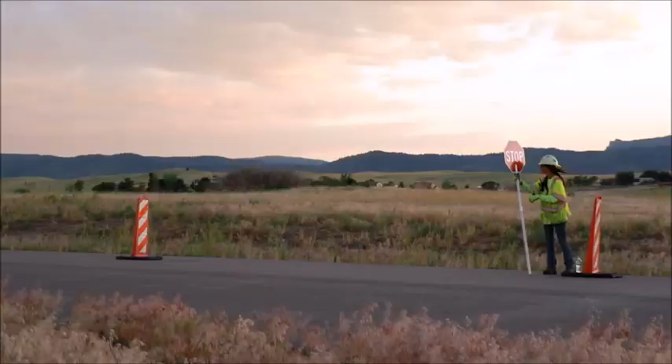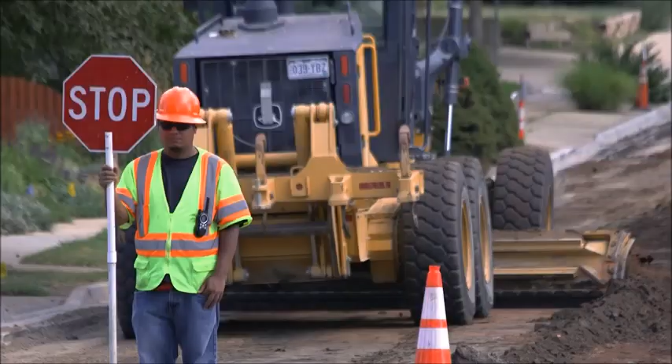It can be a fun and rewarding job, however serious. You must be equipped with common sense and drive for attention to detail, as it is dangerous and you are responsible for the lives of many, not just your own.

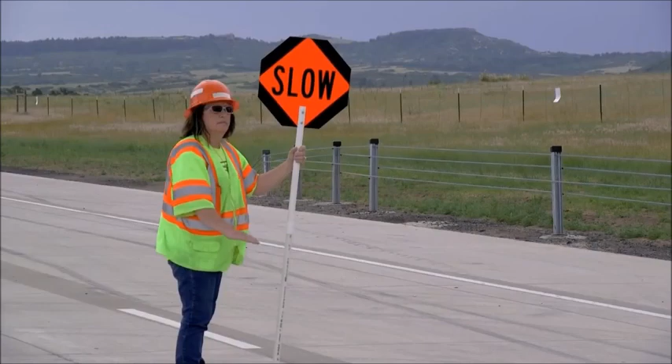As a certified flagger working in the state of Colorado, you will play a vital role in helping to protect the traveling public and your coworkers from the dangers that are presented on a construction or maintenance project.

All flaggers must be certified. The certification process involves study of the training manual, a written proficiency test, and a hands-on demonstration.

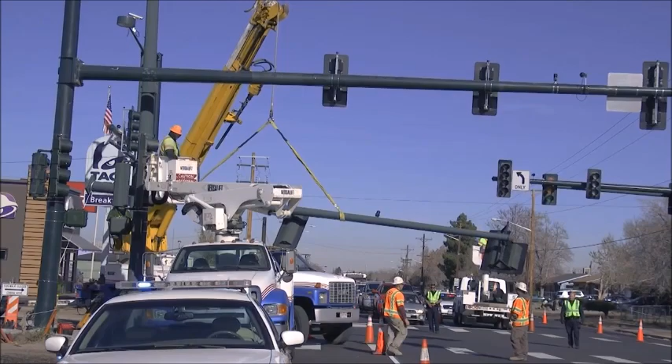In general, flaggers are needed whenever the safety of the working crew or the motoring public is a question. Safety questions arise whenever a traffic lane is going to be blocked, whenever an area is congested and equipment is going to be moved in or out of the project.

This being a general rule, keep in mind each job will have different demands and perhaps different duties.

Each project will have a superintendent who is an employee of the contractor. The superintendent is responsible for all work on the project. The traffic control supervisor reports to the super, and you, the flagger, will be a direct report to the TCS.

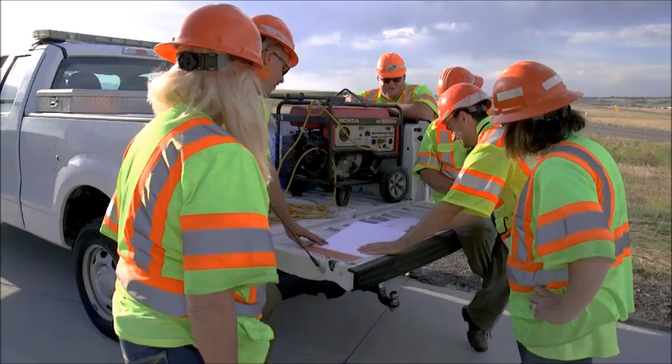A TCS will be able to help in any traffic or safety situation and be able to answer any question you may have. Remember, as a flagger, you should always ask questions when you are unsure.

In addition, CDOT staff may include the resident engineer, the project engineer, and the inspector, who will monitor the quality of the work being performed in all areas of the project.

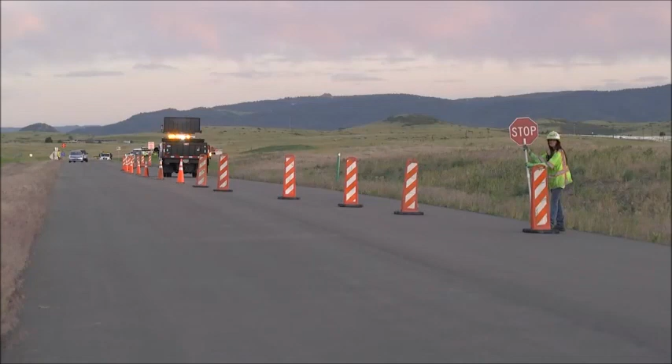It is the employer's responsibility to ensure that the flagger meets the minimum qualifications as outlined in the Manual on Uniform Traffic Control Devices. Because flaggers are responsible for public safety and make the greatest number of contacts with the public of all highway workers,

they should be trained in safe traffic control practices and public contact techniques.

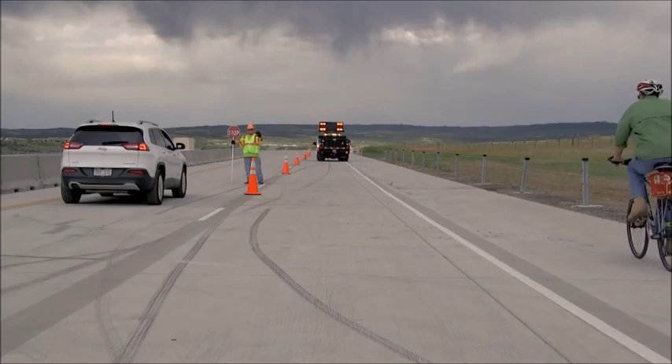Flaggers should be able to satisfactorily demonstrate the following abilities: Ability to receive and communicate specific instructions clearly, firmly, and courteously.

You will need to have a good working knowledge of normal traffic laws and regulations, as well as the more technical duties you must know as a flagger.

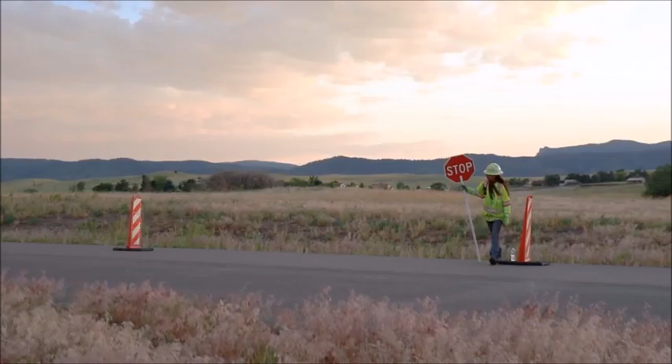You must know about the situation you are working in. You may be the only link the traveling public has with the work zone. You must be able to answer questions intelligently when asked, and you should know what kind of work is being done.

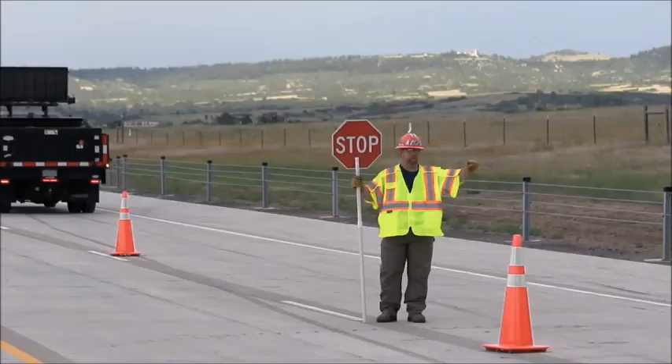You must always see yourself as a public relations person while at your station. Remember, a smile and a polite answer will go a long way in making the public more comfortable and less frustrated. Be polite, brief, and firm in your explanation.

You have the authority to control and regulate traffic around and through work zones.

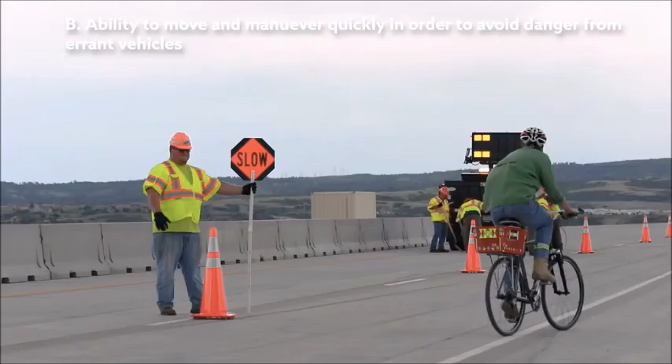Ability to move and maneuver quickly in order to avoid danger from errant vehicles. As a flagger, you are the first line of defense and are responsible for protecting yourself and your coworkers from traffic that is near the roadwork area.

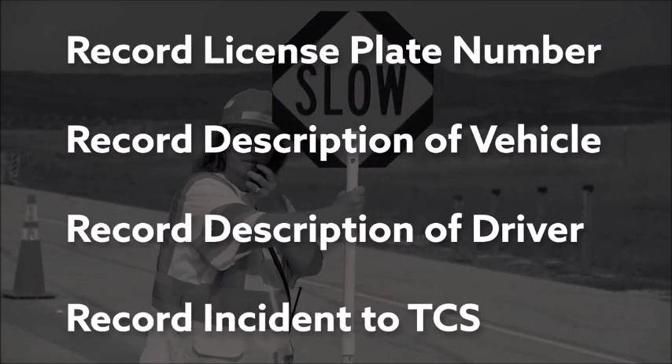If a careless or erratic driver does not obey your commands, such as refusal to slow or stop, try to get the license number of the vehicle or a description of the vehicle and/or driver. Report this to your supervisor.

Remember, you are not a police officer. It is important, and it is your responsibility, to remain at the flagging station at all times. Establish breaks with your TCS prior to your shift to ensure adequate coverage at all times.

Ability to control signaling devices in order to provide clear and positive guidance to drivers approaching a temporary traffic control zone in frequently changing situations.

You should be aware of all the flagging techniques and be able to use them on your job. This includes not only the actual flagging movements, but also equipment you will be using, such as different signs and traffic control devices.

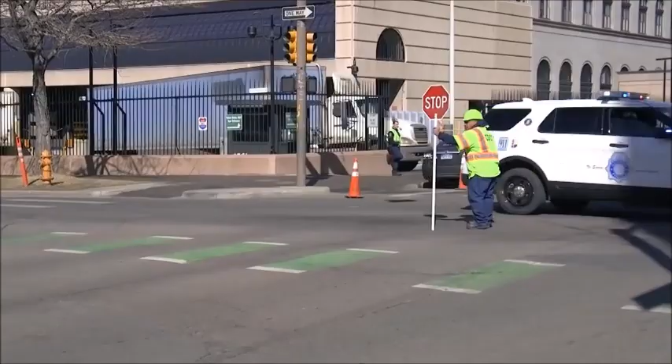This requires the ability to understand and apply safe traffic control practices, sometimes in stressful or emergency situations. Be aware that emergency vehicles may have to pass through the work zone. They do not have automatic passage through the work zone, however, provide access as soon as possible. Alert your coworkers to the passing of emergency vehicles.

The ability to recognize dangerous traffic situations and warn workers in sufficient time to avoid injury is essential. Be aware of weather conditions like heavy rain, snow, or fog. Bad weather may shut down the project, however, frequently traffic control must remain in place. You must know how to perform your job duties under any weather condition. You must also know the traffic conditions.

You may be on a high-speed, busy freeway, or on a moderate-speed byway or a city street. The speed and volume, as well as the type of roadway, may very well make a huge difference in your job. Your flagging station position is important for a number of reasons.

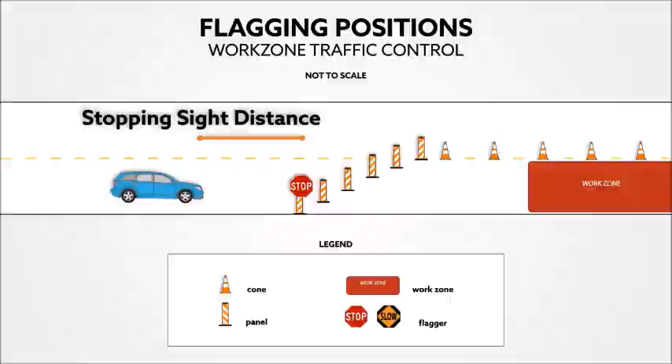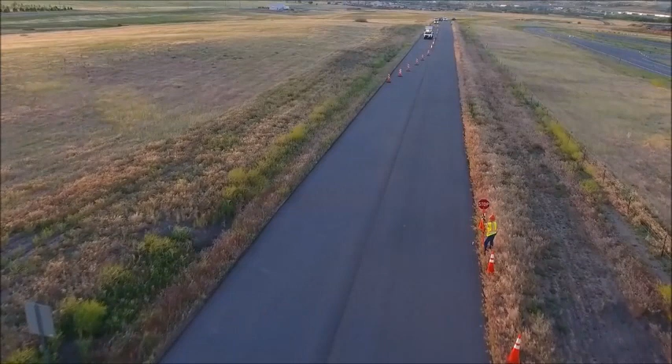You must be knowledgeable about the required stopping sight distances. You must be positioned so that you are clearly visible to oncoming traffic and have an escape route. You must be stationed far enough ahead of the worksite so that cars and even heavily loaded trucks can slow down enough to stop. You must be close enough to the work being done to protect your fellow workers.

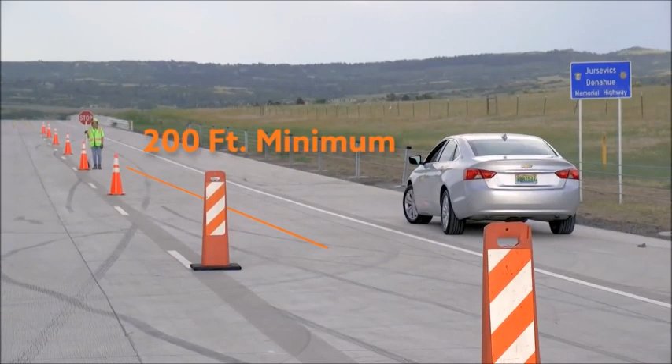Do not stand behind an object, just over the crest of a hill, just around the curve of a road, or next to a parked car. All personal vehicles should be parked 200 feet away and out of the right-of-way. Visibility is limited if you're next to anything that limits safety and mobility practice.

There are actions that prevent you from properly performing your responsibilities. Examples are mingling with the crew, relaxing, sitting down, listening to music, using a mobile device, or smoking while on duty. These actions make you less visible and less able to perform your role as a traffic and safety monitor.

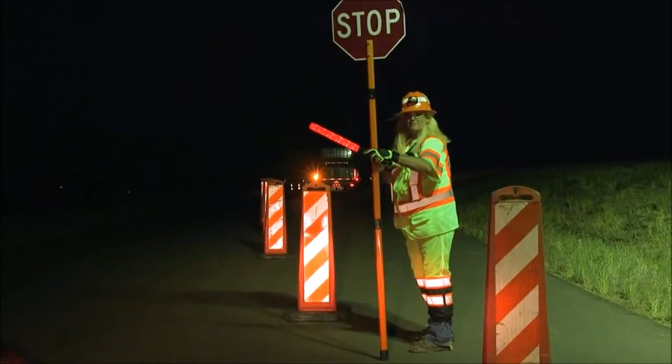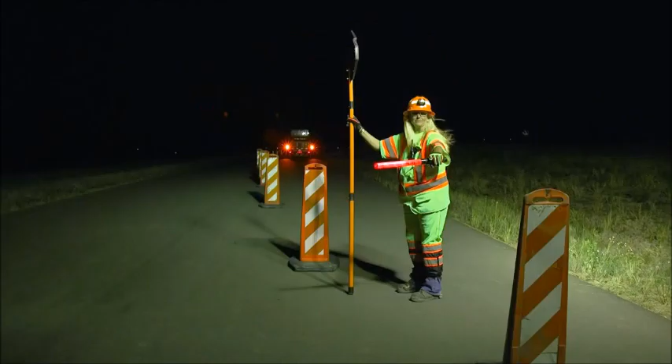Nighttime flagging can be very dangerous if not done properly. However, you can assure safe operations for you and your crew if you follow standards. Always wear a retro-reflectorized hard hat and apparel to help make you as visible as possible. Always use illuminated tools such as flashlights, lighted wands, and retro-reflectorized paddles and signs. Your flagging stations shall be lighted for night operations.

You are constantly exposed to dangers from the work activities, as well as from erratic or careless drivers. You may and will have to use your own judgment very quickly. Remember, always have an escape route. As a flagger, you will need to know where to stand to flag, the kinds of signs and devices to use, and information and instructions regarding the traffic situation. If you need help in a certain kind of situation, ask your TCS.

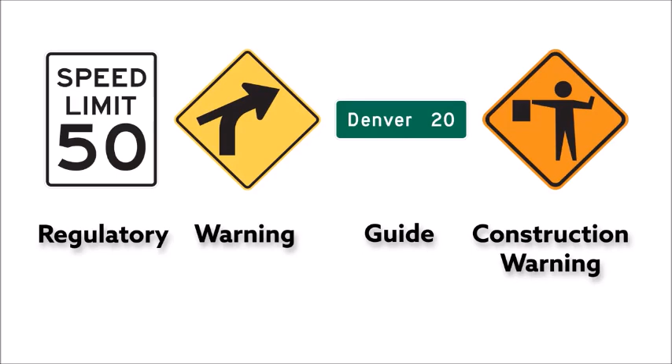There are 4 types of signs a flagger should know about. They are regulatory, warning, guide, and construction warning signs. Each type of sign has a different purpose and function. Each category of signs has a certain color and shape scheme so that they are easily recognized.

Regulatory signs impose legal obligations and restrictions on all traffic. Examples include speed limit signs, stop signs, and do not enter signs. Most regulatory signs carry a black legend and border on a white background. Stop and yield signs are octagonal or triangular in shape with white letters on a red background. You should be familiar with the regulatory signs as they do carry the full weight of the law. Please note, flaggers are not police officers. Only a police officer can override an existing regulatory device, such as a stop sign or a red light.

Warning signs notify the driver of traffic ahead. The motoring public should adhere to these signs. Warning signs are black letters on a yellow background with a black border.

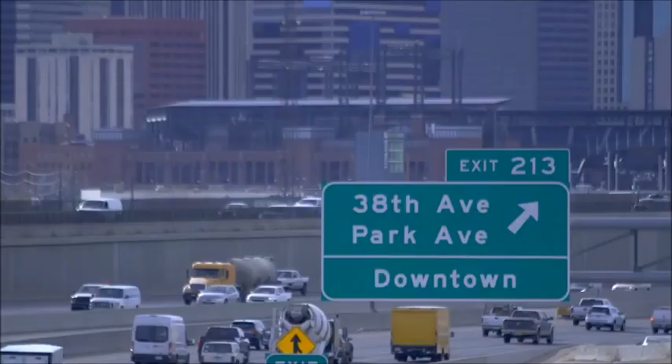Guide signs are information signs. They give the motorist destination information. Many guide signs are white letters and border on a green background. These signs also indicate directions and route markings.

Construction warning signs used for construction and maintenance projects notify drivers of construction dangers or hazards. Construction warning signs are generally, but not always, diamond-shaped and carry a black legend and border on an orange background. Some examples include roadwork ahead, flagger ahead, right lane closed, road closed ahead, and detour ahead. These signs may give special information relating to the work being performed, and may also indicate directions and route markings.

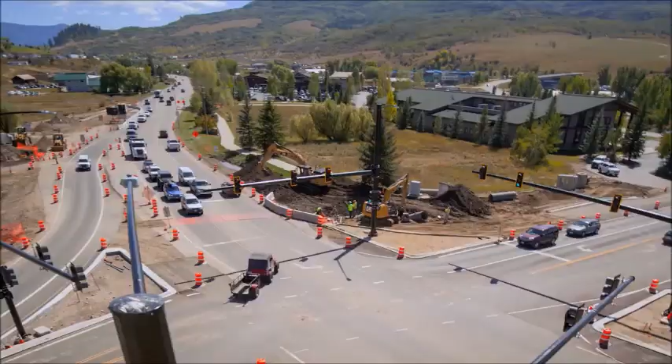There are many types of traffic control devices used in highway construction and maintenance work zone operations.

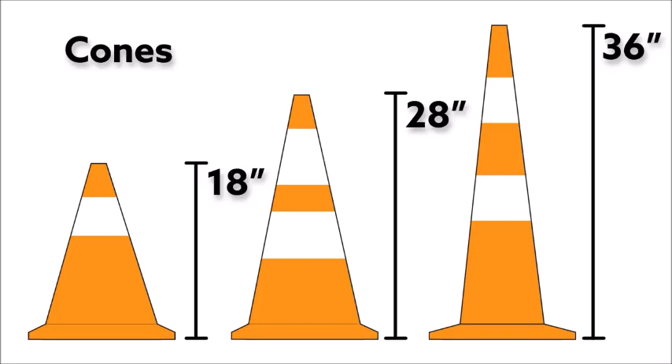Cones are the most frequently used traffic control device. They are lightweight, easy to move, and very visible to the traveling public. Cones are bright orange and are 18, 28, or 36 inches tall. They are typically 36 inches on high-speed roadways, which is a requirement for CDOT projects. Cones can be blown down or knocked over due to natural wind or wind generated from passing traffic. Never leave your flagging station to reset devices; inform the TCS of the situation.

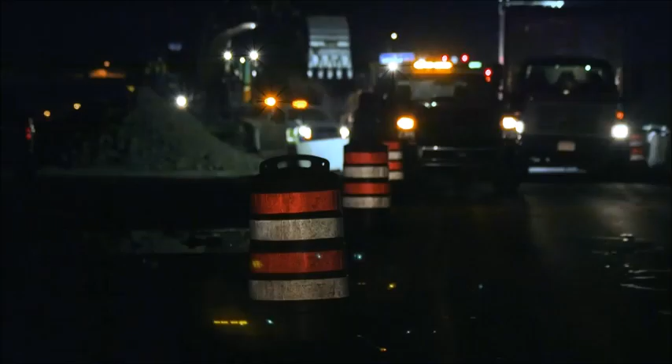Drums are very effective devices for controlling traffic. They are much larger and much more visible to the traveling public, and very effective in blocking areas where the crew is working. Drums are used in lane closures for long-term projects.

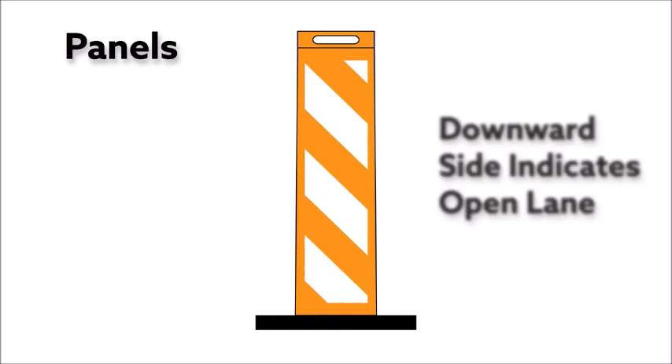Vertical panels are also an effective traffic control device. They are vertical, rectangular panels with downward diagonal stripes indicating the open lane. Vertical panels or drums must be used in the taper on state highways.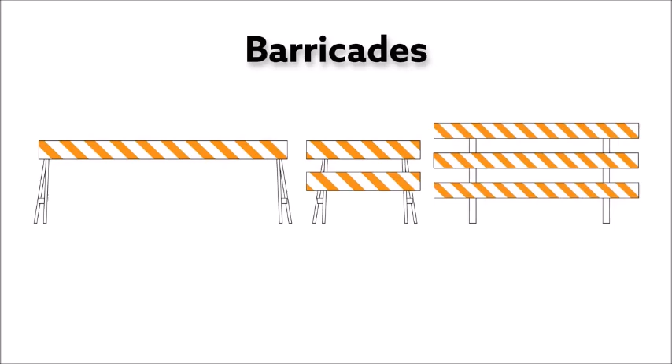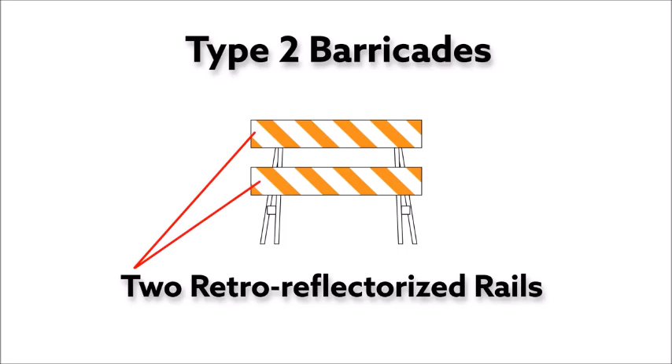There are 3 types of barricades used on construction projects. Type 1 barricades are portable and have a single horizontal retro-reflectorized rail, used on low-speed, conventional roads and urban streets. Type 2 are less portable than Type 1 and have 2 horizontal retro-reflectorized rails, used on higher speed roads. Type 3 are for extended road closures and have 3 horizontal retro-reflectorized rails.

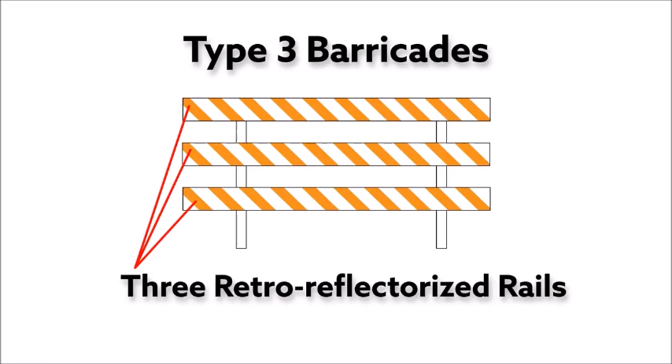Direction indicator barricades include an arrow and are used in tapers, transitions, and other areas where specific direction guidance to drivers is necessary. Again, the slanted stripes and arrow indicate the open lane.

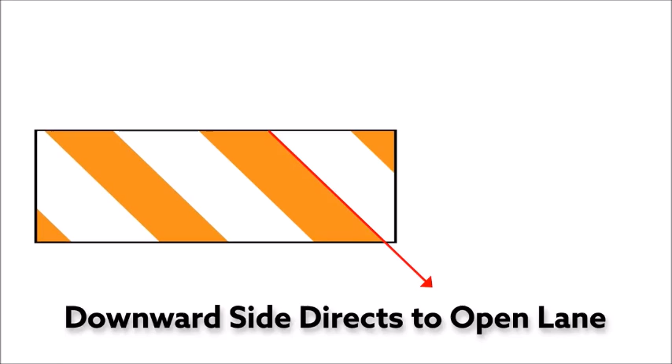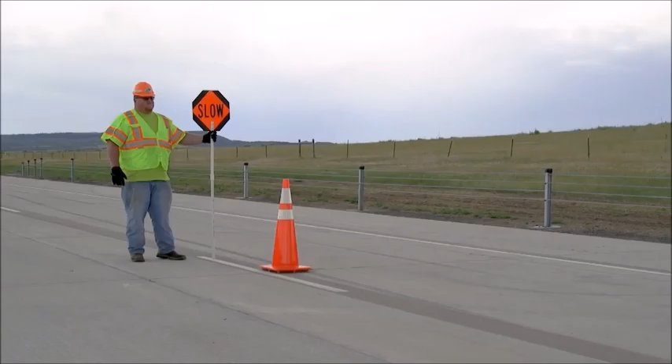The piece of equipment that you will use to control traffic is the stop-slow paddle. The paddle is mounted on a 5-foot staff for convenience and shall be maintained at a height to be visible to oncoming traffic. One side of the paddle is the stop sign, which is octagon-shaped with white letters on a red background. The other side is the slow sign, with black letters on an orange background in a simulated diamond. Both sides shall be retroreflective.

When flagging at night, you may use a flashlight with a red lighted cone on the end. The lighted part of the flashlight should be red and at least 6 inches in length. You may also use a lighted wand for nighttime operations; lighted wands are generally 30 inches in length.

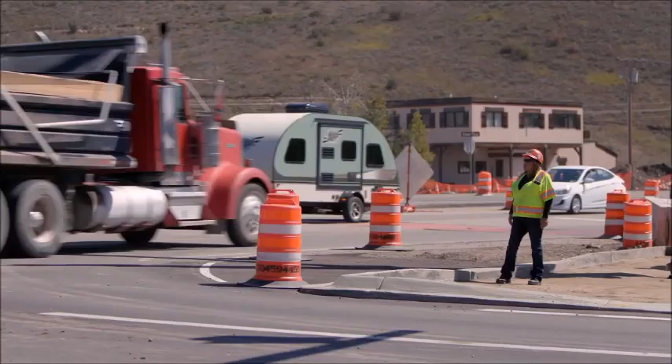There are several tools used to improve safety, including radios, air horns, or whistles. These may be issued to you to alert the work crew of danger. Radios aid in flagging situations where one part or end of the roadwork cannot be seen by the flagger or flaggers.

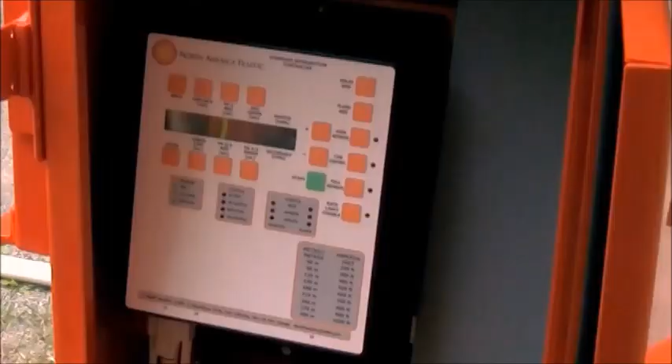As worker safety is a priority, AFADs were created to allow a flagger to remotely control traffic while remaining safely outside the travel path. These devices are not autonomous and require a certified flagger to operate. You must be properly trained before operating an AFAD in the field.

You must dress appropriately for the job. This is for safety and visibility reasons, and for overall consistency so that your authority is not questioned. Visibility is of very high importance, both day and night. If traffic cannot see you, they will pose a hazard to you and the work crew. Wearing the proper high visibility apparel helps with standardization and will help identify you as a flagger and your responsibility to safety.

All flaggers shall wear safety apparel meeting the requirements of the ISEA American National Standard for high visibility apparel, labeled as meeting the current ANSI 107 standard performance for Class 3 apparel risk exposure. Background materials shall be fluorescent orange-red, fluorescent red, or fluorescent yellow-green, and have retro-reflective material to provide the wearer greater visibility to the traveling public. This clothing is required by law. Anytime you are acting as a flagger, you must wear safety apparel that meets ISEA and ANSI standards. The apparel increases your visibility.

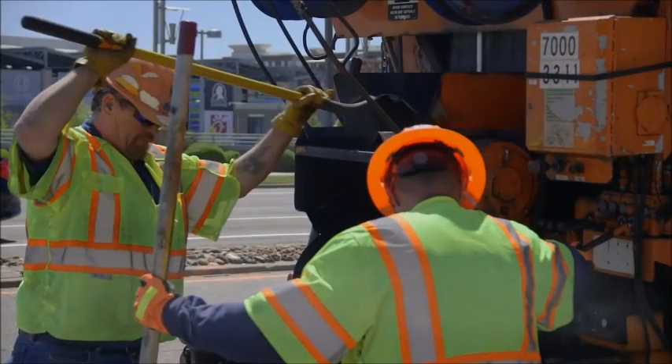The hard hat is part of the recognized standard uniform for flaggers and is required by CDOT. Hard hats shall be fluorescent orange-red or fluorescent yellow-green and include retro-reflectorized material. The hard hat also protects your head from flying debris and other dangers.

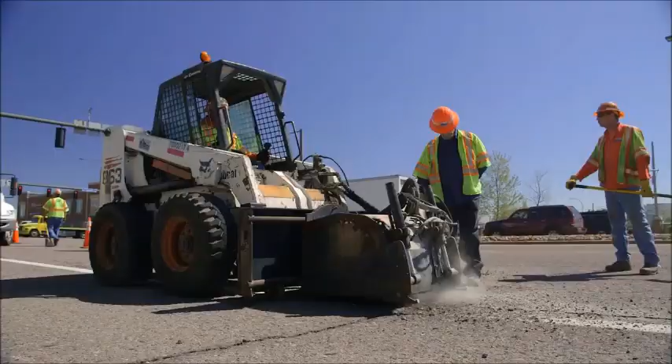You should always wear work boots that cover your ankle. They will help protect your feet from hot surfaces, uneven surfaces, and will help keep your footing around construction equipment.

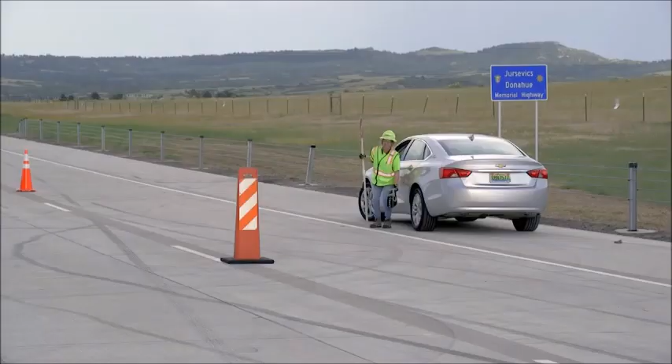There are other items you may want to have with you: a dust mask, hearing protection, gloves, a windbreaker, sunscreen, retro-reflectorized rain gear, and any other items that help combat the elements. Pack a bag with these items to keep at your station. Remember, always dress so that you are visible, safe, and comfortable, and always wear the mandatory apparel and hard hat.

The three basic functions of flagging are stopping traffic, releasing traffic that has been stopped, and slowing traffic. Each function is performed differently.

To stop traffic, make sure the paddle is held straight up and not leaning. Only wave the paddle to communicate with other flaggers. Make sure the stop sign is directly facing traffic. The free arm shall be held with the palm of the hand above shoulder level towards approaching traffic. It is very important to catch the eye of the driver.

After the first vehicle has stopped, move to a clearly visible position near the center of the roadway or to the left of the stopped vehicle. Do not touch the stopped vehicle. Do not cross the center line.

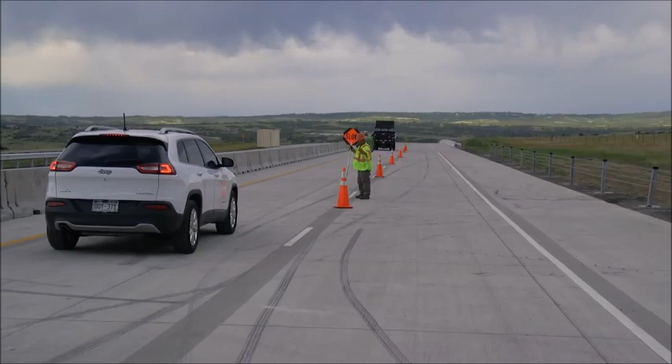To release traffic: when it is safe to release stopped traffic, move to the right of traffic and stand facing the traffic flow. Then turn the paddle to slow and with deliberate arm movements, motion for traffic to proceed.

To slow traffic, face traffic with the slow side of the paddle facing traffic. You can emphasize your position by using your free arm, slowly raising and lowering it towards the ground with your palm down.

Make sure your flagging station is lighted and your tools are properly retro-reflectorized. To stop traffic, make sure the paddle is held straight up and not leaning. Do not wave the paddle. Make sure the stop sign is directly facing traffic. You may use your free hand as discussed before, or use a flashlight or lighted wand to stop traffic.

To release traffic, lower your light and use a slow sweeping motion to allow traffic to proceed. The slow side of the paddle should be visible to traffic. To slow traffic, standing in your lighted flagging station, use the slow side of the paddle facing traffic. Swing your light across your body with a slow motion.

Up and down means the other person or flagger stops traffic. This can be a question or statement. Back and forth means the other person or flagger releases traffic. This can also be a question or statement.

If you cannot stop or release, or it is not clear to send traffic, answer in the same manner as the other flagger. Always have an answer. The other flagger needs to know that you saw their communication. Default is always on stop.

The TCS has the authority to change the signals for the duration of the project, however, must implement a signaling system. You are responsible for guiding the motoring public efficiently through or around a work zone, protecting the lives of yourself and your fellow workers, and protecting the public from the potential dangers present in the work zone.

Remain alert at all times. Always wear the proper equipment and apparel to do the job safely and correctly. Acquaint yourself at the start of the shift to current operations and activities. Treat each driver as if they were the first driver you have faced all day.

Be extra careful when flagging at night. Become familiar with all equipment and tools you may use during the time you are at your flagging station. Stay at your flagging station until you are properly relieved.